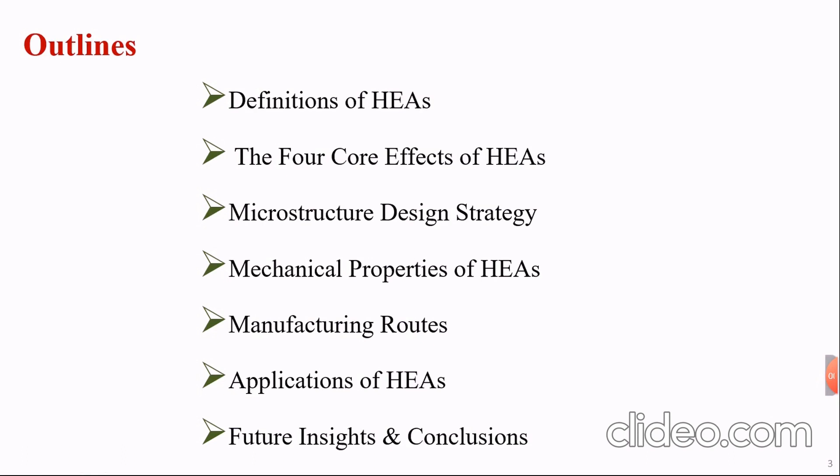As you know, since long ago, materials engineers have been looking for a good combination between strength and toughness, which is not easy because both properties contradict each other. When you increase the strength of the alloy, you lose toughness, and vice versa. Therefore, metal matrix composites, ceramic composites, oxide-dispersed alloys, max-phase alloys, and high entropy alloys have been developed.

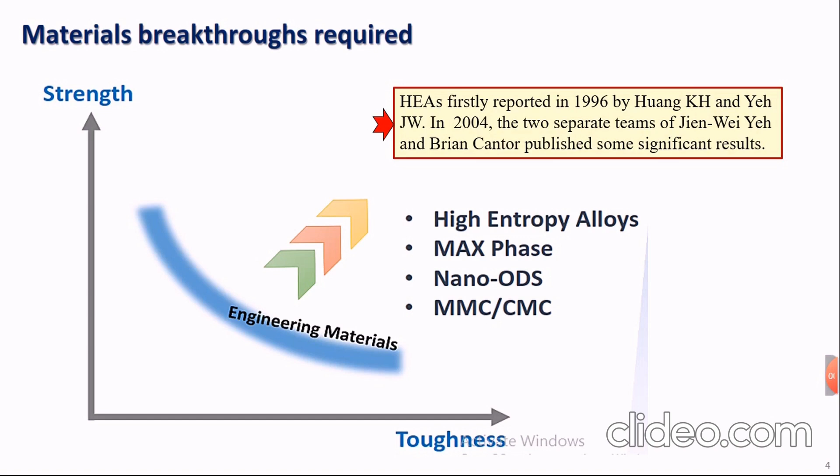High entropy alloys started as a research project for some students in 1996. Then in 2004, two separate teams, Yeh and co-workers, and Cantor and co-workers, published some significant results about high entropy alloys. Since this date, several papers have been emerging.

So, what's a high entropy alloy? High entropy alloys can be defined as multi-principal element alloy, or equiatomic alloy, or compositionally complex alloy, or concentrated solid solution alloy. We will see the reasoning for each definition.

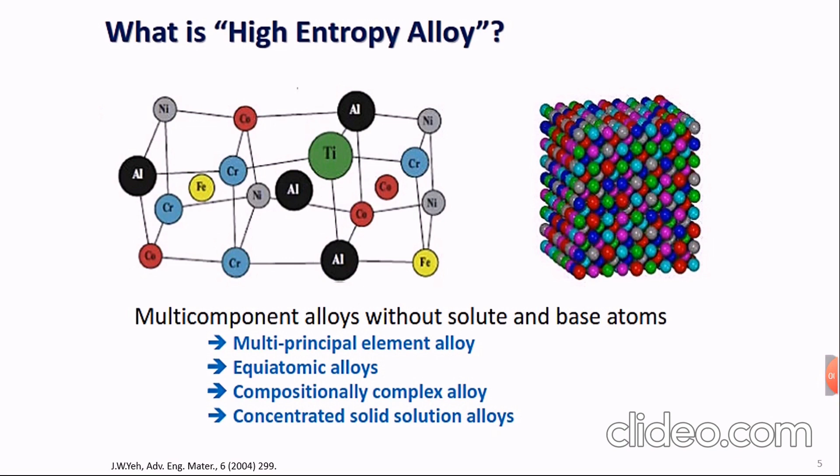We have in the galaxy a very, very large amount of elements, and you have freedom to mix these elements in your own way to form a high entropy alloy. So you have an unlimited number of possible alloys, because you can design the alloy as you like.

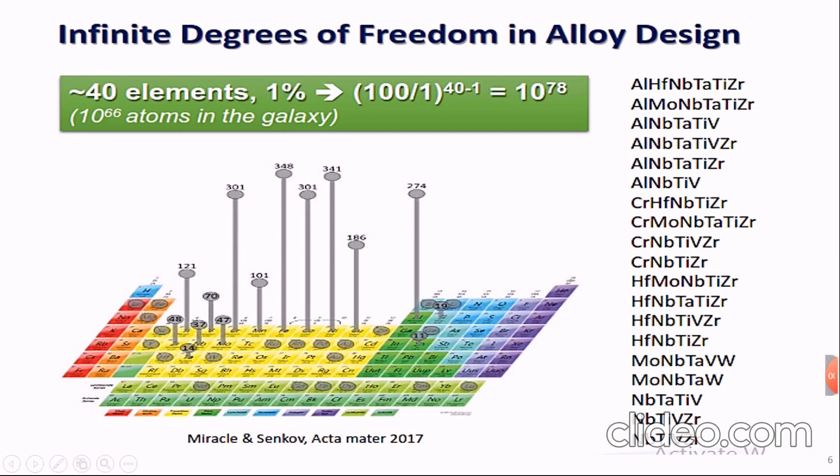You can design the alloy according to your requirement. You can make light alloys, ceramic alloys, refractory alloys, hard alloys, soft alloys - it depends on your choice. So some people say, based on that concept, we can call it multi-component alloys or multi-principal alloys.

Some others said, no, we'll call it high entropy alloys or equiatomic alloys. Why? Because the concept of high entropy alloys is that you mix elements in an equiatomic or near-equiatomic manner to increase the entropy of the system.

Why do you need to increase the entropy of the system? Because if you remember the Gibbs free energy equation, if you increase the entropy of the system, you will decrease the free energy. And if you decrease the free energy of the system, you can have solid solutions. That's why some people also call it solid solution alloys.

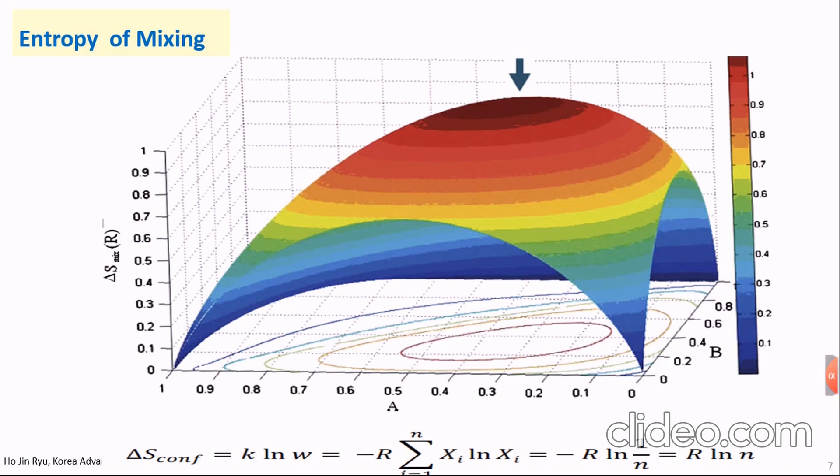In high entropy alloys, our main target is to have solid solutions, not intermetallics. You can have some intermetallics, but very limited. The main concept is to design solid solutions.

Simply, you can say high entropy alloys are alloys that have at least 4 or 5 principal metallic elements, and they can have equal or near equal compositions. For example, we have equimolar aluminum, cobalt, chromium, copper, iron, nickel, and we can also have non-equimolar compositions, as you see.

We can have in high entropy alloys minor additives like carbon and boron, but you have to be careful - the minor additives should be controlled, because if increased more than required, it will make the system unstable and you will not have the high entropy alloy you desire with solid solutions. You can end up with intermetallics, so we have to pay attention.

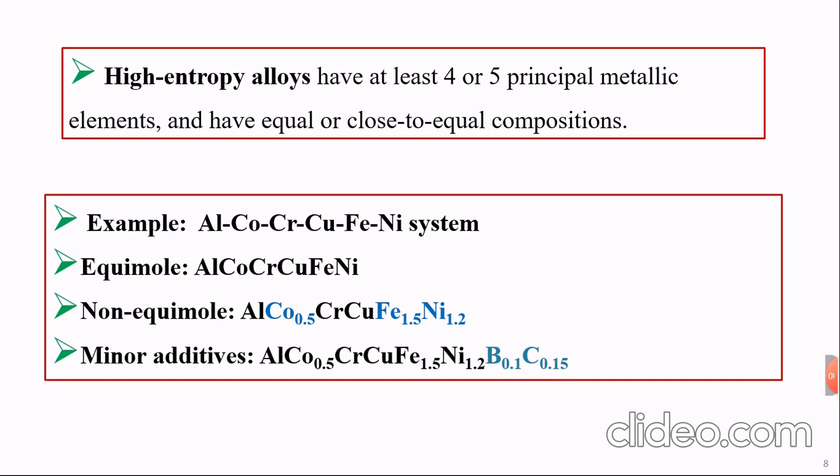Someone may ask, why do high entropy alloys have such extraordinary properties? This is due to the secrets I was talking about. The first one is the cocktail effect.

As you saw in the video at the beginning, we have a cocktail - this cocktail effect should produce special properties. Second, we have the high entropy effect - you have a special system with very high entropy, so you have to think about it. Also, we have the sluggish diffusion effect, and the most important one is the lattice distortion effect.

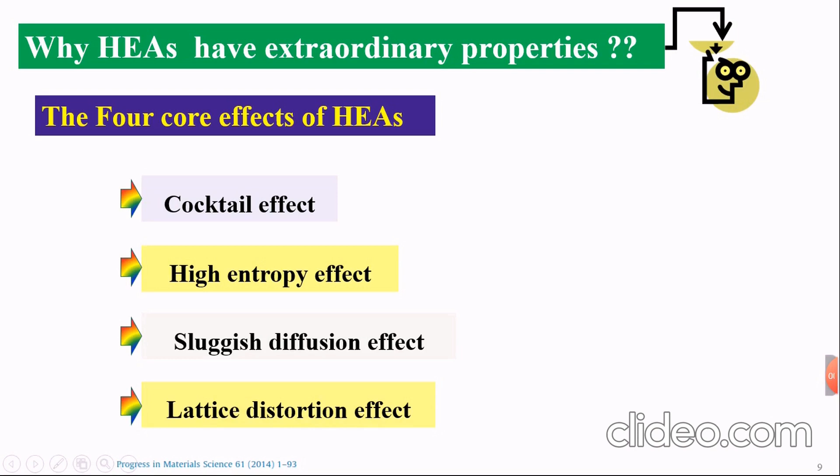What does the cocktail effect mean? In regular alloys, if your alloy is an aluminum alloy, you expect it will be soft and deformable, and so on. If you have a titanium alloy, you expect it will be hard, have high strength, corrosion resistance, and so on.

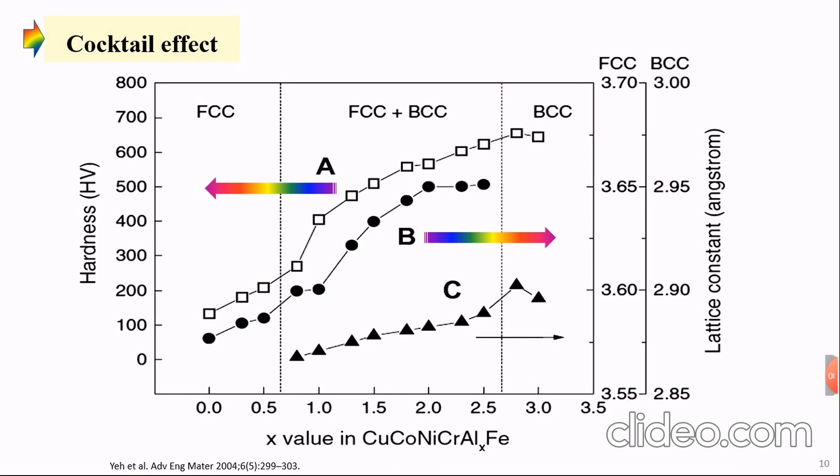Unexpectedly, the hardness increased with adding aluminum, although aluminum is a soft element. So here you obtain properties which cannot be expected - that's why they call it the cocktail effect. In the beginning of the video, if you remember, in the cocktail you have a color which is different than the color of all the fruits. So this is a high entropy alloy.

The second effect is the high entropy effect. Someone may ask, how high does the entropy need to be? Some researchers divided it into low, medium, and high entropy alloys based on plotting configurational entropy versus temperature, where configurational entropy is related to the gas constant. So if delta S over R is over 1.5, it's high entropy. If between 1 and 1.5, it's medium entropy. If lower than that, it's low entropy or even a conventional alloy.

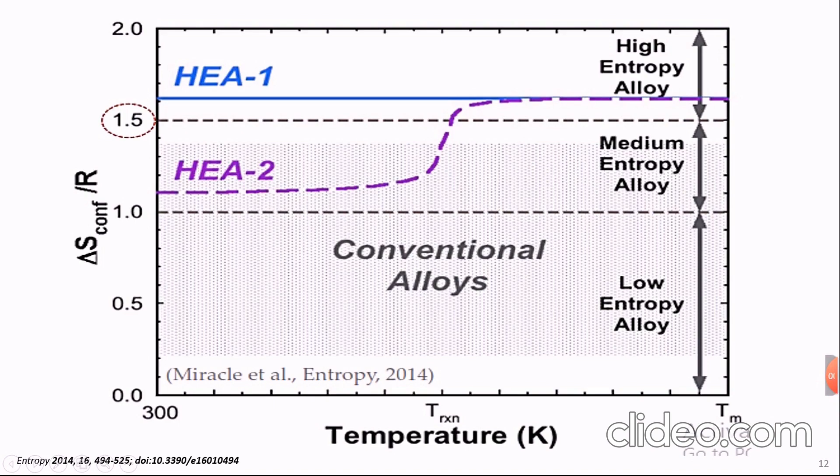Then we come to the sluggish diffusion effect. In high entropy alloys, diffusion is actually very slow. Why? Because you have a mixture of small, large, and medium atoms arranged in a funny way, so the variation of lattice potential energy among lattice sites is high. This creates numerous low lattice potential sites that act as traps and suppress atomic diffusion. Compared to a dilute solid solution, the high entropy alloy has traps in the diffusion path, like ants diffusing through an obstacle course. That's why diffusion is very slow - this is called the sluggish diffusion effect.

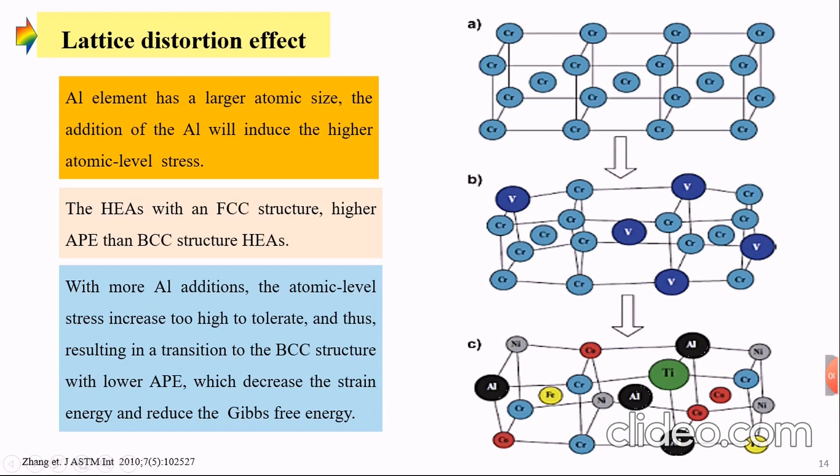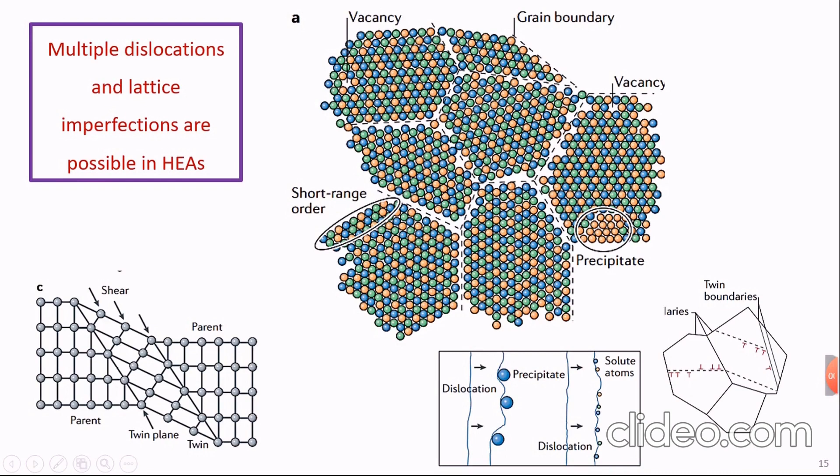The most important effect is the lattice distortion effect. Why? For example, if you have a system with small atoms and add a big atom like aluminum, the atomic-level stress increases too high. So the system has to reduce the energy, and in this case, as we saw in the previous alloy, the structure changes from FCC to BCC to decrease the Gibbs free energy. Because of this lattice distortion, we get many dislocations - all types you can expect in high entropy alloys, along with dislocation interactions. These dislocations and their interactions are responsible for the strength in high entropy alloys, so this lattice distortion effect is very important.

Microstructure design strategy of high entropy alloys is very important, because not all alloys with 4 or 5 principal elements in equiatomic ratio compositions can form high entropy alloys with solid solutions. According to previous studies, only carefully chosen compositions can form FCC, BCC, or a mix of them.

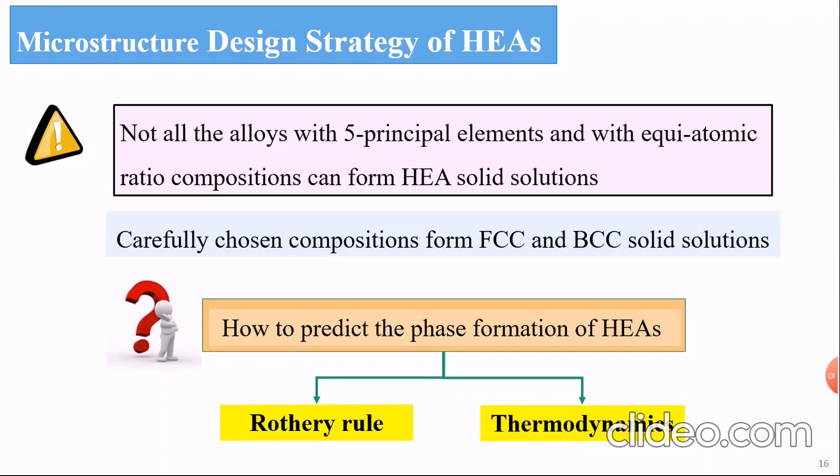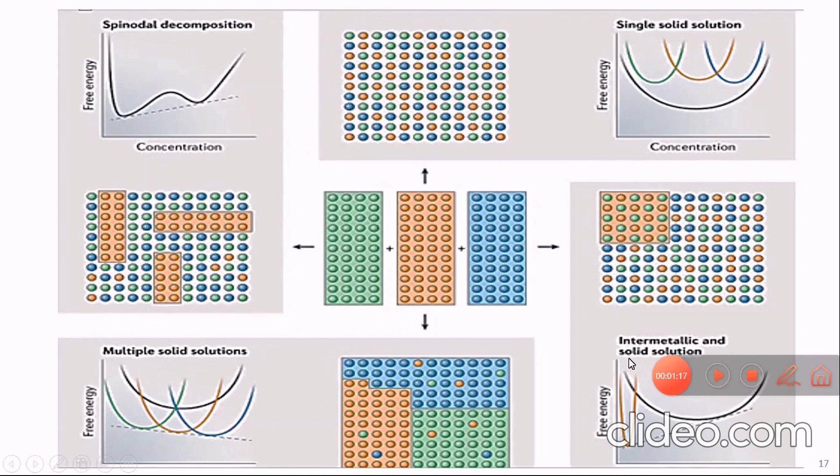So how do we predict the phase formation of high entropy alloys? To design a high entropy alloy, you have to consider the parameters that fall under Hume-Rothery rules and thermodynamics. If you mix three different elements, there are possibilities they form a single solid solution, intermetallics with solid solutions, or even multiple solid solutions, depending on the mixing manner. If you change the mixing method, you change the system - so you can have a single solid solution with intermetallics or multiple solid solutions.

The Hume-Rothery rule contains three main parameters: atomic size, electronegativity, and electron concentration. If we look at the XRD patterns comparing intensity and 2 theta for different high entropy alloys: with only two elements, copper and nickel, we get FCC. If you add aluminum, you can get ordered BCC. If you add cobalt to the system, you get normal, regular BCC. If you add more elements, you get different solid solutions. Why? Because every element added has a different atomic size, electronegativity, and electron concentration, affecting the total electron concentration in the system. So every element you add changes the type of solid solution formed - it can be single or double solid solution, ordered or disordered, depending on the additives you use.

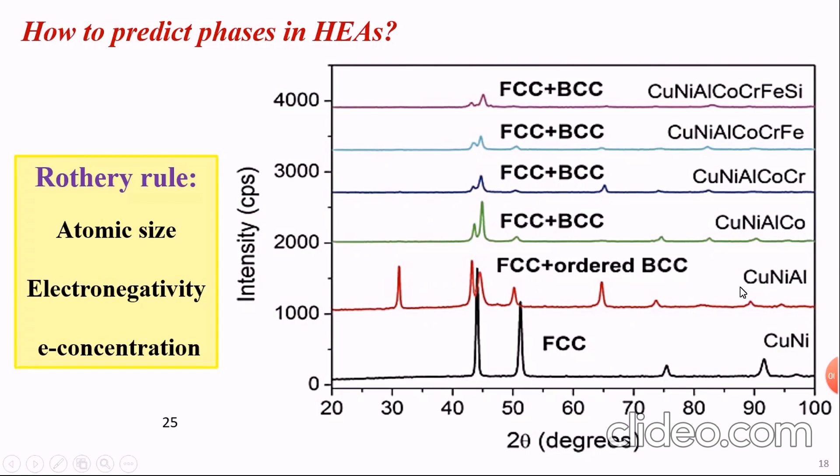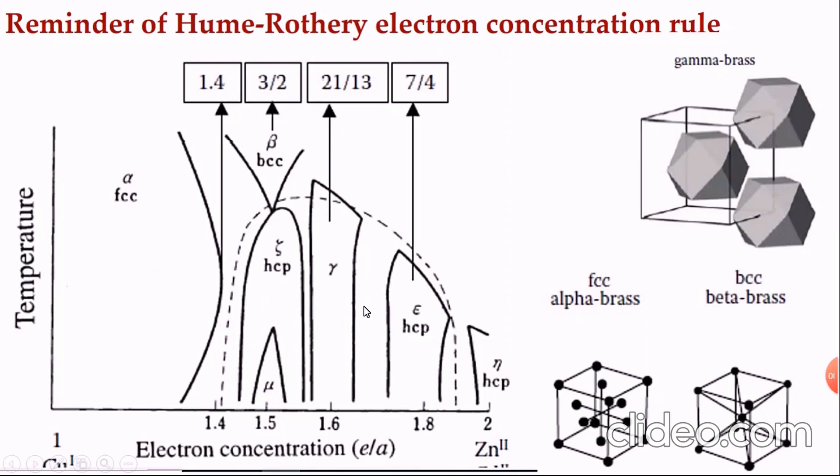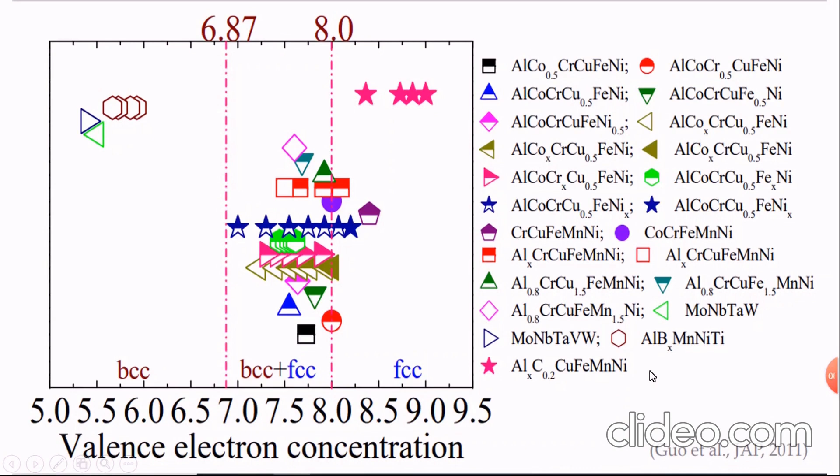Second thing to consider is the thermodynamic consideration of the system. Why? Because the main concept, as I said, high entropy stabilizes the formation of solid solution phases. To form a solid solution, we have to decrease the Gibbs free energy. As you studied in thermodynamics in your bachelor degree, if we maximize the entropy, we will decrease the Gibbs free energy, and at that time we can obtain solid solution.

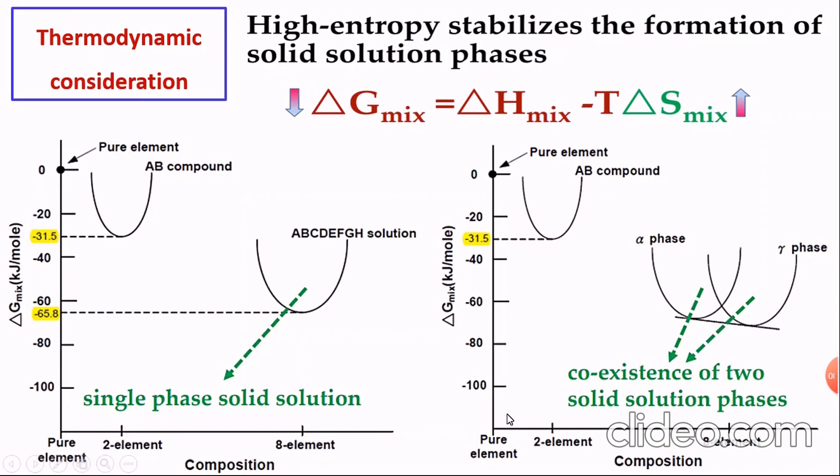Otherwise, we can obtain intermetallics. According to the Gibbs free energy plot with composition, we can have a single phase solid solution if we have delta G, or mixing entropy, or Gibbs free energy minus 65.8. For example, with decreased Gibbs free energy, we can have compounds. If we reach this level, we can have coexistence of two solid solution phases. So the value of Gibbs free energy is very important in determining the type of solid solution of your system.

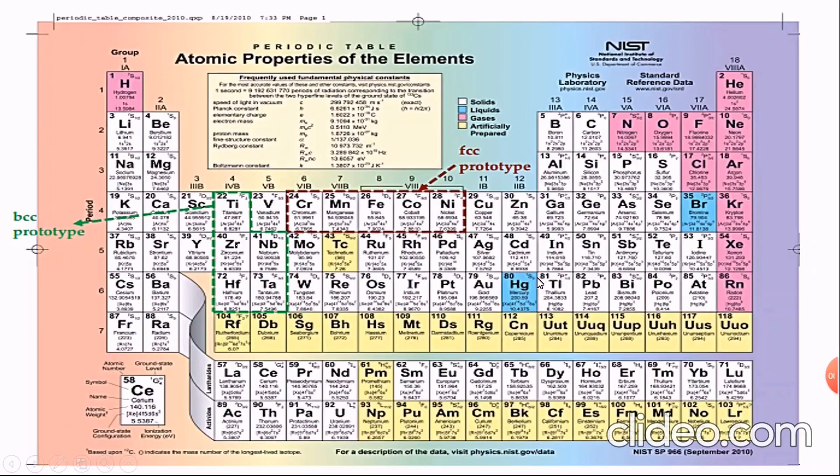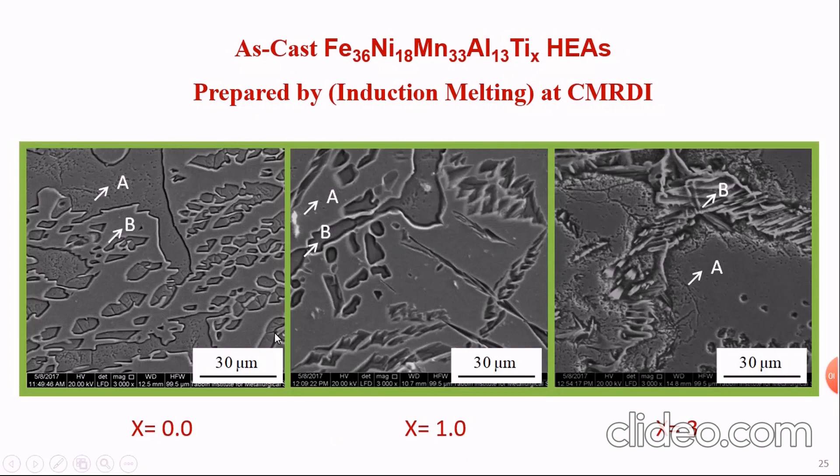These are examples, for instance, as-cast iron, nickel, manganese, aluminum, titanium high entropy alloys. These percentages are in weight percent, not atomic percent. This alloy was prepared at my institute by induction melting, repeating the induction melting process. This alloy has two phases, which changed in their percentages in the microstructure according to the titanium addition. This was 0 titanium, 1 titanium, 3 titanium. And here, as you see, you have solid solution of two phases.

Some other people, Wu et al., prepared an alloy by arc melting, nickel, cobalt, chromium, iron, aluminum, tungsten alloy. And as you see, you have two phases, FCC and BCC. And this is the elemental distribution of the different phases.

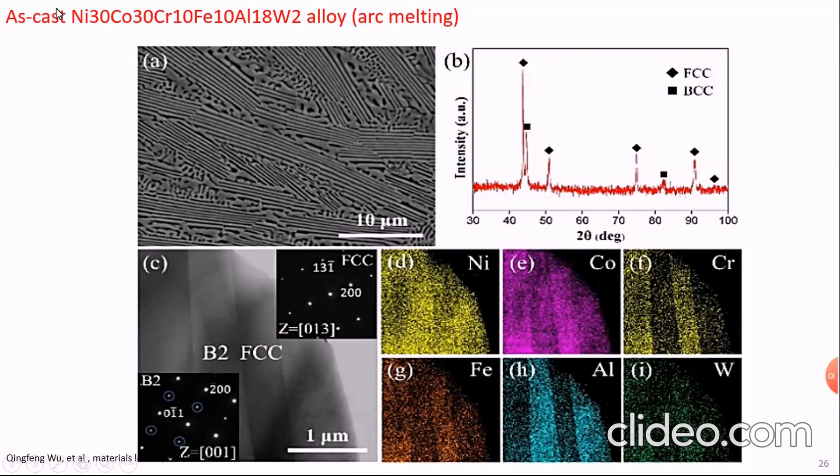Actually, high entropy alloy is a very interesting alloy, as you see. We also have lightweight high entropy alloys, which are based on light elements like magnesium and aluminum. Actually, the main difference is that in the literature, some researchers observe that in lightweight high entropy alloys, we have a greater amount of intermetallic compared to heavy weight high entropy alloys. Here, as you can see, we have some magnesium silicide along with the alpha magnesium matrix. So don't worry when you find intermetallics in your lightweight high entropy alloys.

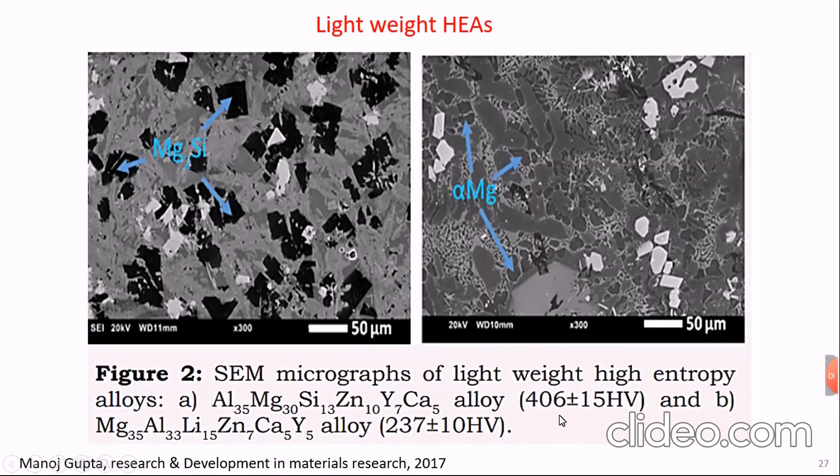It's usual according to the literature. Here, for example, this is aluminum, magnesium, silicon, zinc, yttrium, calcium high entropy alloy, and it showed good mechanical properties but has more intermetallics.

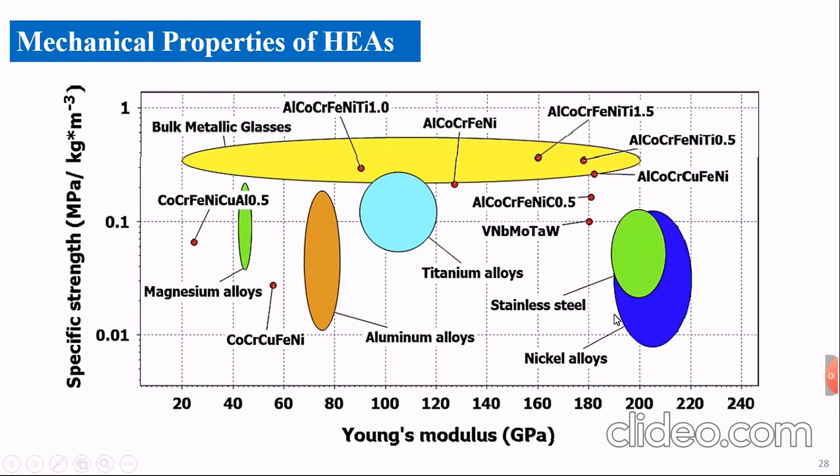Why do high entropy alloys have such specific strengths and this variety of Young's modulus? Because as I said before, the properties of high entropy alloys can be controlled. As we remember, this is an example of aluminum. When we add aluminum with little additives, increased one by one, it changes the structure completely from FCC to BCC. This means the properties totally change. So the control of properties in high entropy alloys is very good, and they can lead to extraordinary properties.

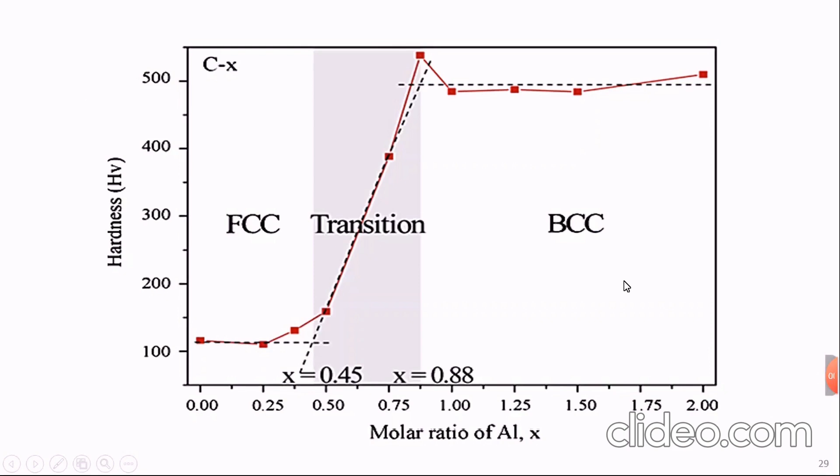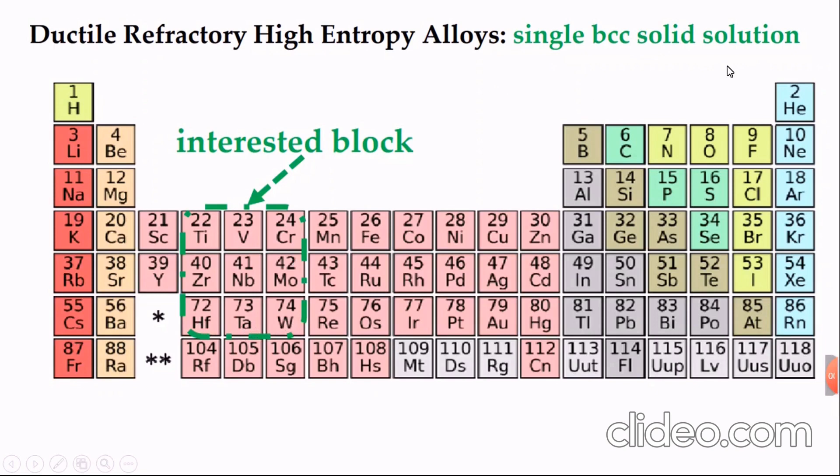Some people give examples of ductile refractory high entropy alloys, and it's very strange to hear ductile while we have refractory, which is very interesting. Some people suggested this interesting block of elements to have single BCC solid solution, and in reported research, they could obtain molybdenum high entropy alloys with 40% ductility, which is actually a very high percentage of ductility for a refractory high entropy alloy.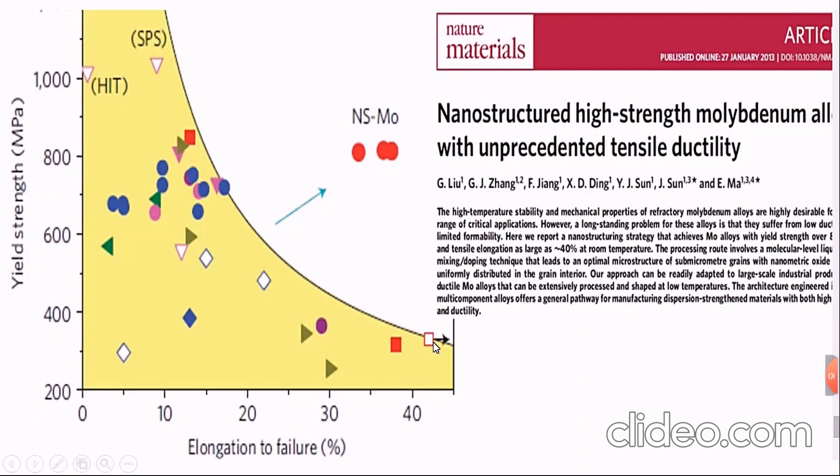Of course, in high entropy alloys, it's better to study the microstructure by transmission electron microscope, because most of the features that give the properties to high entropy alloys cannot be seen without it. So it's very important, especially if you design a new alloy and need to reveal the reasons behind the good properties, you have to use transmission electron microscope facility.

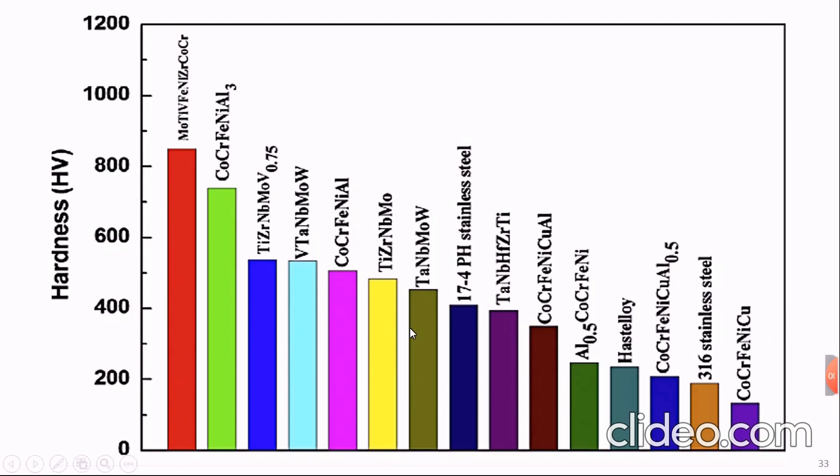If you compare the hardness of high entropy alloys to Hastelloy, super alloys, and steel, you can find that high entropy alloys acquire the highest hardness among the other alloys. And of course, hardness is related to strength, meaning these alloys also have high strength.

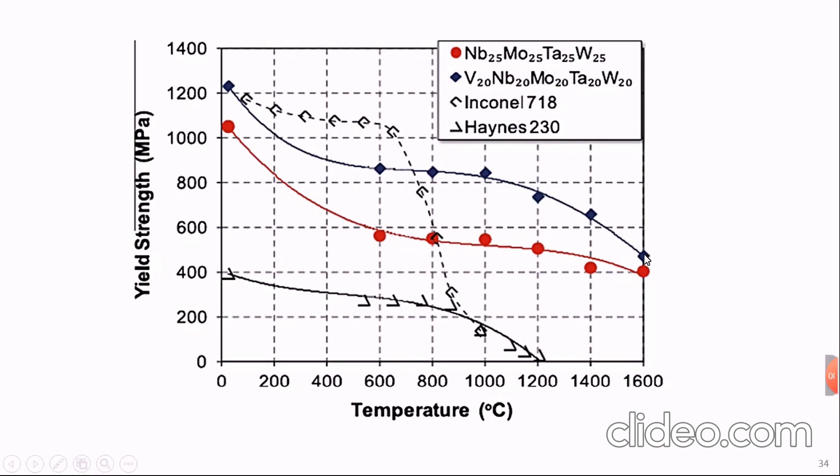Another important thing is strength at high temperatures, which is very important for some applications like the aviation industry. If you compare the yield strength at different temperatures for two high entropy alloys to the super alloys Inconel and Haynes, we can find that high entropy alloys can extend their lifetime to higher temperatures. They can extend and keep their strength at higher temperatures, so it's very good for high temperature applications.

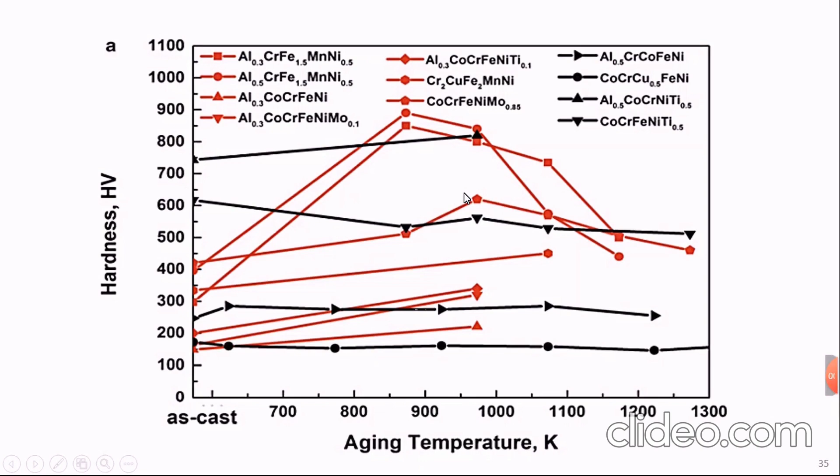Also, high entropy alloys, similar to regular alloys, can be modified by heat treatment. So the strength can be enhanced further by heat treatment, which is very good. This is an example of different alloys that acquire higher strength with temperature of aging.

Then we come to the practical part of the lecture, which is manufacturing routes. Some people divide the manufacturing routes into gas-based, liquid-based, and solid-based processes. But here I followed another type of classification, according to the produced product.

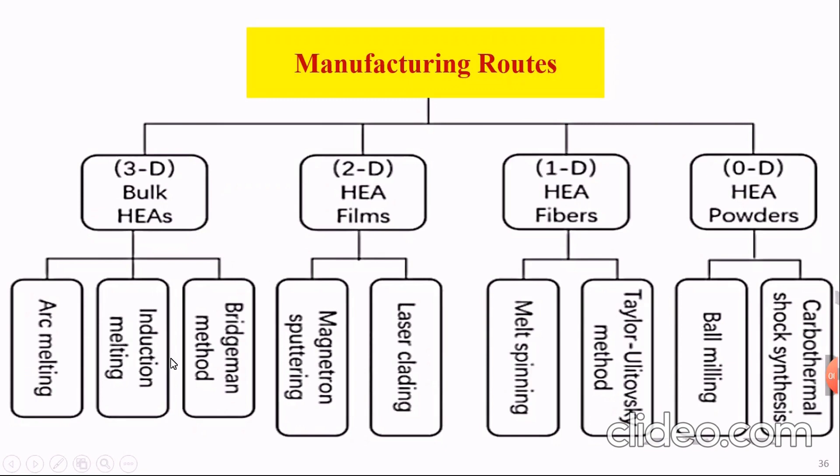For example, high entropy alloy powders, which are zero dimension, can be fabricated by ball milling. High entropy alloy fibers can be fabricated by melt spinning. Two-dimensional high entropy alloys like coatings and films can be fabricated by laser cladding or magnetron sputtering. For 3D bulk high entropy alloys, they are fabricated by casting methods.

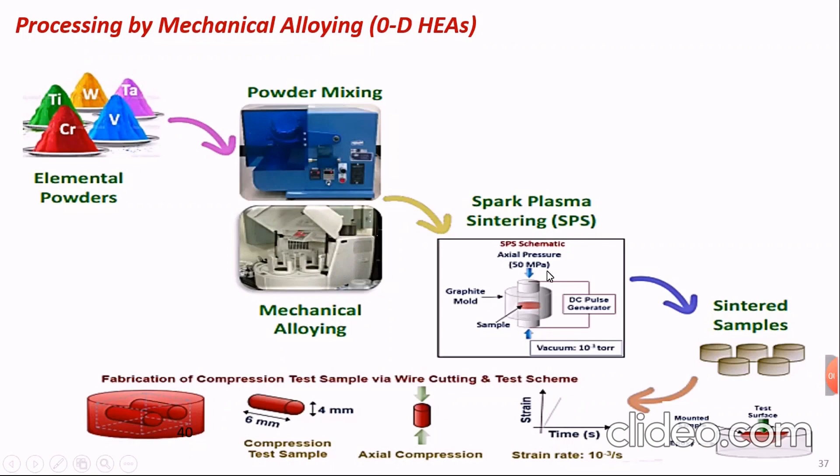First is to fabricate zero-dimension high entropy alloys by mechanical alloying. You have to follow the steps for powder metallurgy, which is powder mixing, sintering, compressing, and so on.

Here is an example of mechanical alloying. This is a high energy ball mill in which the particles strike together, so there is kind of fracturing and cold welding occurring. The particles are combined together under this interaction in the high energy ball mill, for example, in the high entropy alloy nickel, cobalt, iron, chromium, aluminum.

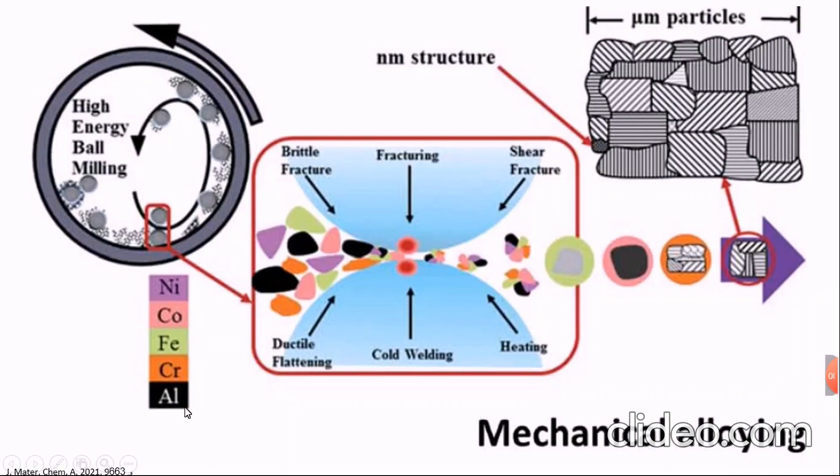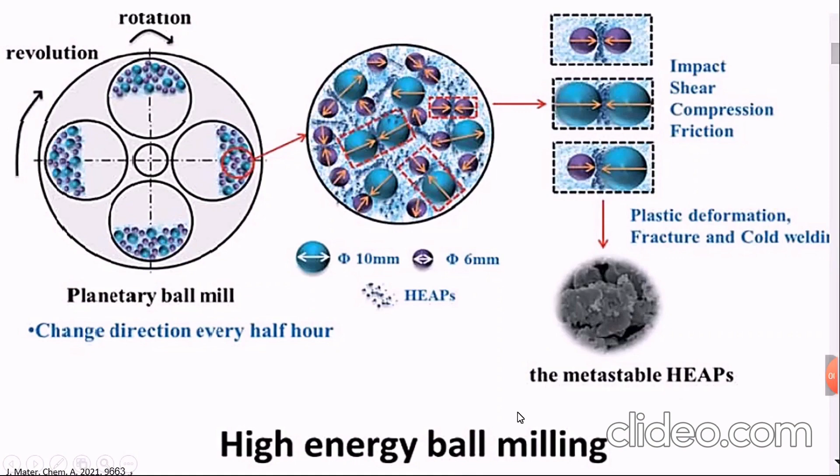Another type is the planetary ball mill. In this type, the direction of rotation is changed every half an hour. The particles strike together with impact, shear, compression, fracture, then plastic deformation fracture and cold welding. This is how metastable high entropy alloys are produced by high energy ball milling.

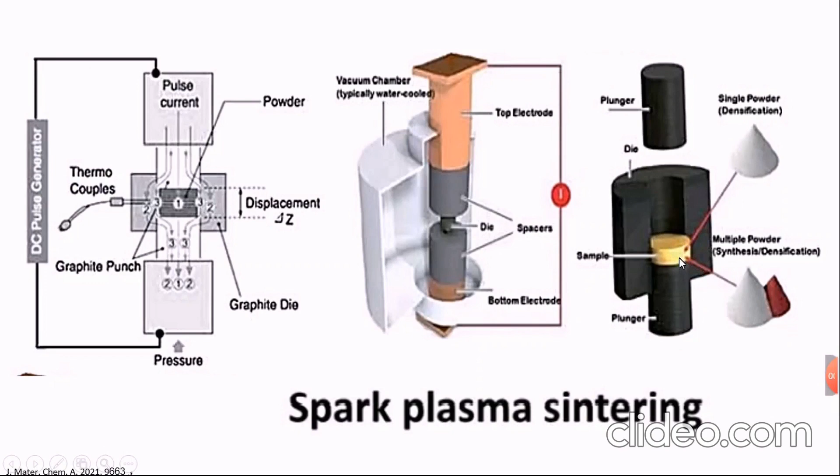Also, spark plasma sintering is one of the known techniques to produce high entropy alloy discs, for example. This is a high entropy alloy produced from multiple powders by synthesis and densification.

High entropy alloy fibers can be processed using melt extraction. Here we have the charge in the crucible surrounded by an induction coil. Once the melt is ready, it's exerted onto the moving copper wheel, so you get your fibers.

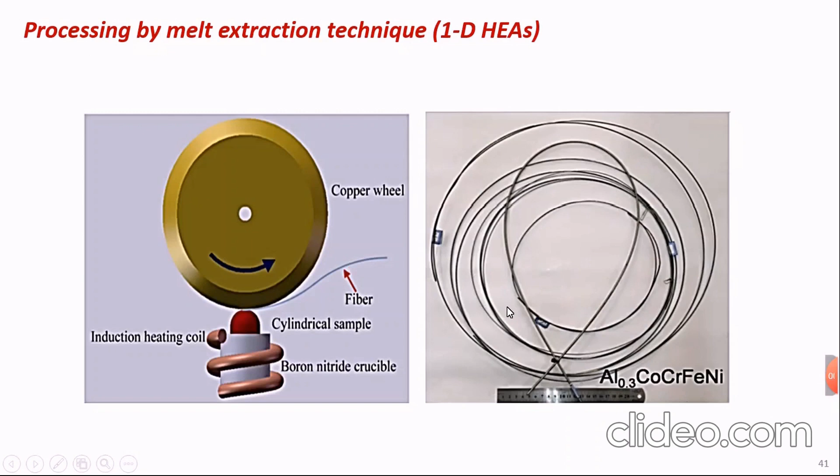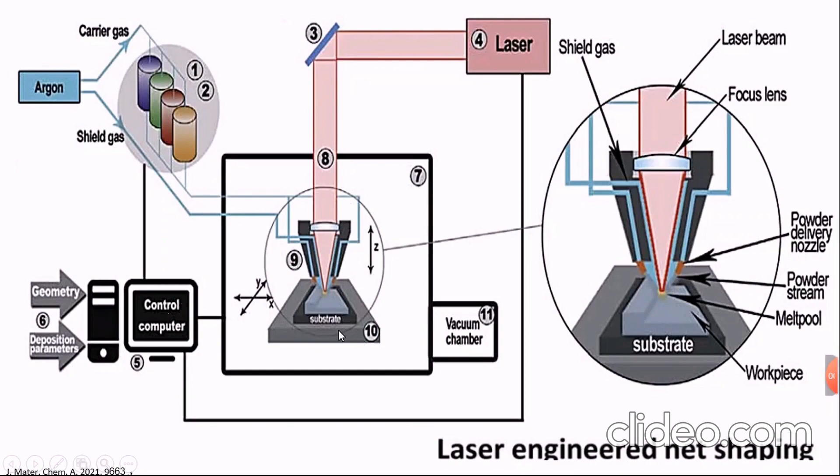One of the most famous techniques is laser cladding, because it allows net shaping, and you can control the rate and temperature to obtain films, coatings, or claddings over your product. Plasma spray process is also a very famous technique in which particles are molten and deposited on the substrate, as you see here.

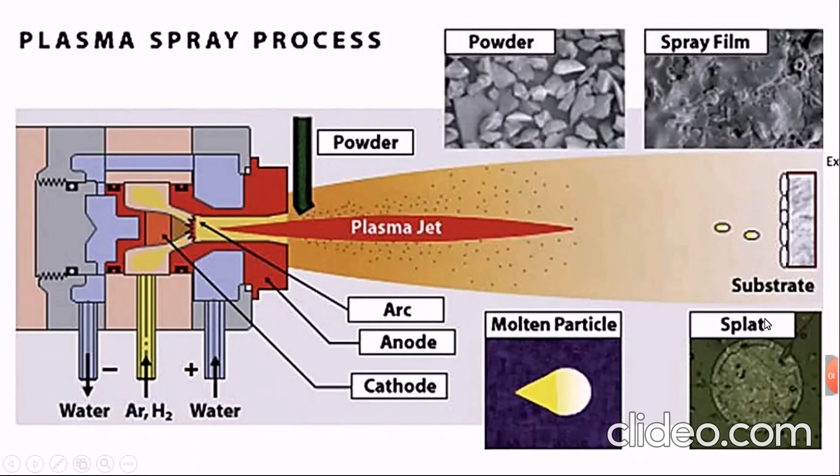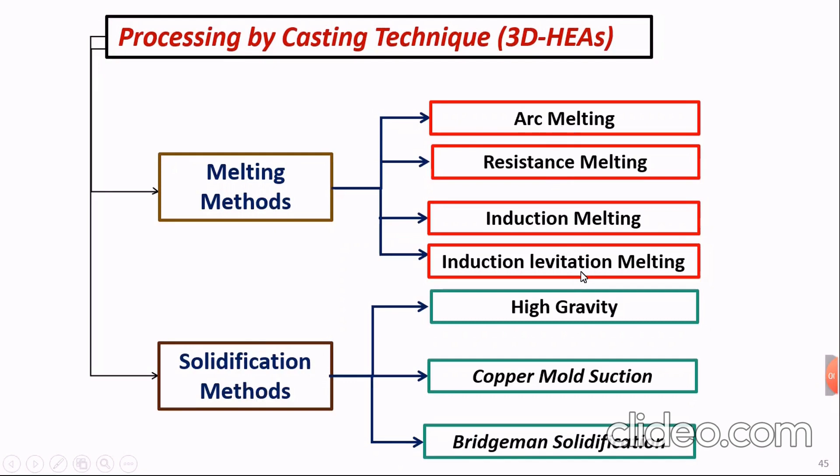Then we come to my specialty, processing by casting technique. Casting technique is divided into melting methods and solidification methods. We divide them because solidification methods are very important in controlling the as-cast microstructure. For melting methods, we'll talk about arc melting, resistance melting, and induction levitation melting. In solidification methods, we'll talk about high gravity, copper mold suction, and Bridgman solidification.

The most important or most famous melting method for high entropy alloys is arc melting. In this method, the charge is placed into the melting pot, and when the electrode comes very close to the charge, an arc is generated, and this arc melts the charge. This method is suitable for high melting point elements, like chromium, iron, vanadium, tantalum, and tungsten high entropy alloys. Of course, it's not suitable for low melting point elements.

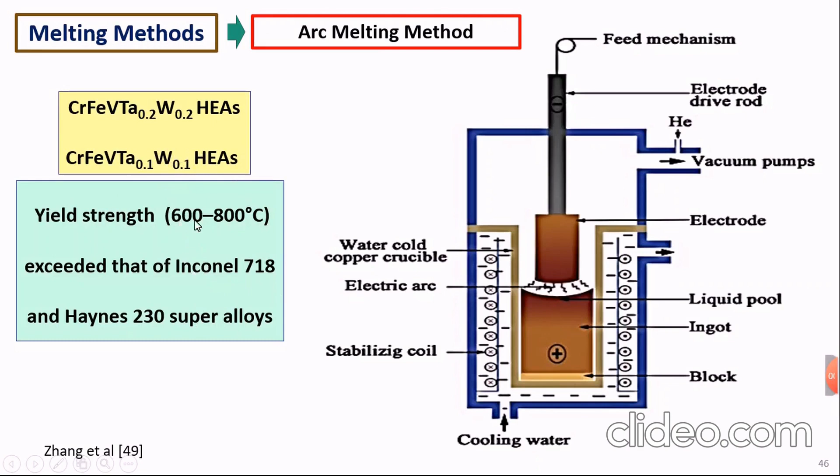The high entropy alloys produced by this method showed high yield strengths compared to superalloys at higher temperatures.

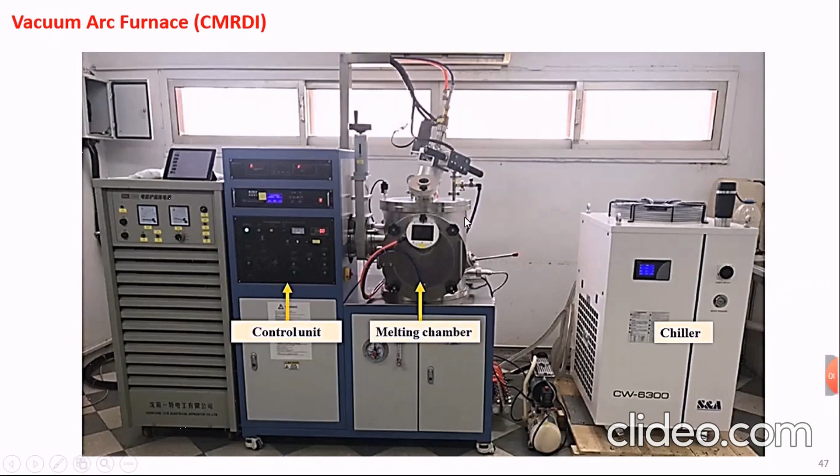This is a vacuum arc melting facility at my institute. We have the chiller, the control unit, and the melting chamber. Inside this melting chamber, the charge is put into the crucible pots, and this is the melting electrode used for melting. Once the melt is ready, we wait for it to solidify, then we melt again. Why melt again? Because repeating the melting process homogenizes your sample.

How many times should I repeat? Some people say 3, some say 4, some 5, some 6. No, it's not important how many times. The more important thing is to obtain homogenized samples, because alloys and elements differ in their viscosity and fluidity. So it's up to your sample, up to your design system.

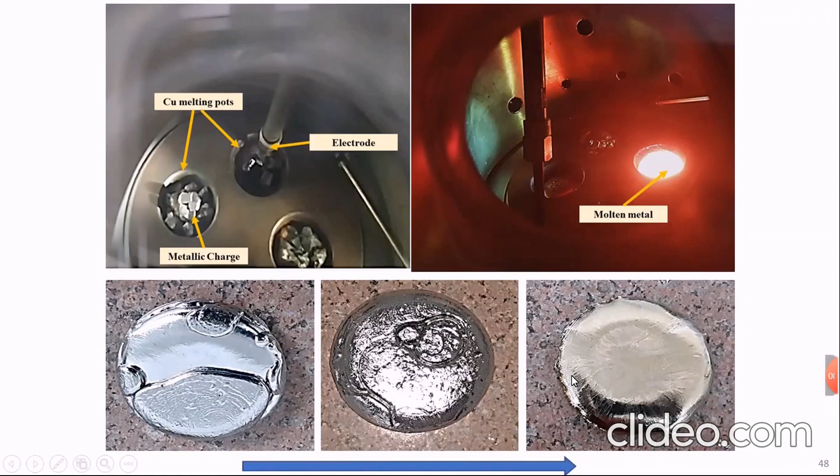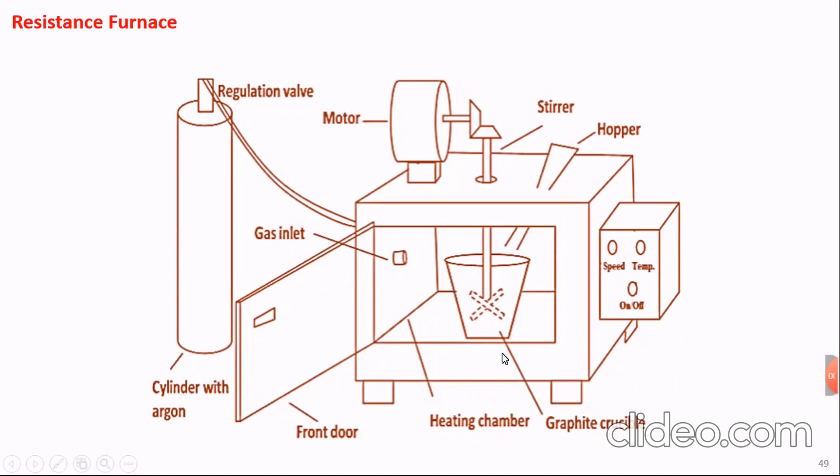Some others use a resistance furnace for low melting point alloys like aluminum and magnesium alloys. They use stirring to mix the components well, and they cast under argon gas to keep the melt away from oxidation.

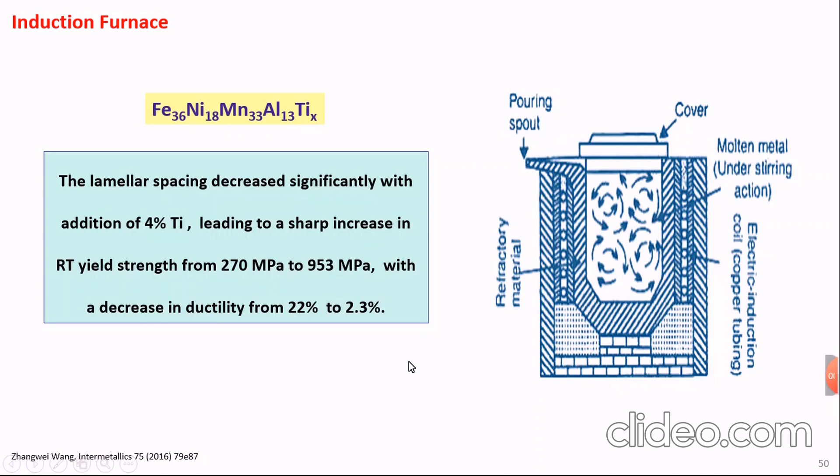The second important melting method is induction furnace, or induction melting. In this method, the charge is inserted into the crucible and surrounded by an induction coil. This method is suitable for melting most high entropy alloys, except for the refractory ones, which require much higher temperatures.

At my institute, we have two facilities. We have an induction melting facility in open air, which we use for non-reactive high entropy systems. For reactive high entropy systems, like titanium biomedical high entropy alloys, we use a vacuum induction melting furnace to avoid oxidation.

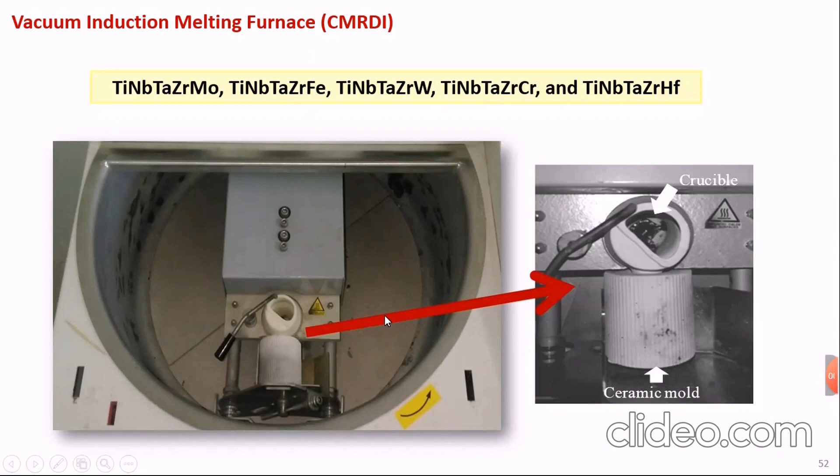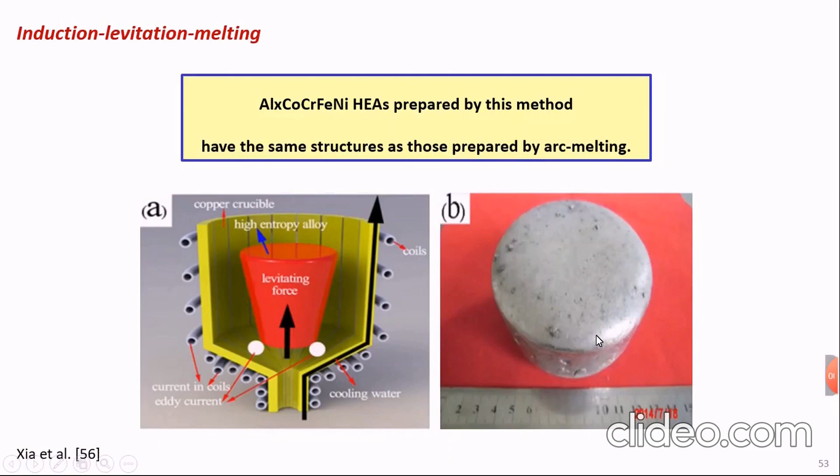The fourth melting method is induction levitation melting. In this method, the charge is heated by eddy current, and we can obtain a large sample, maybe 1 kilogram or more.

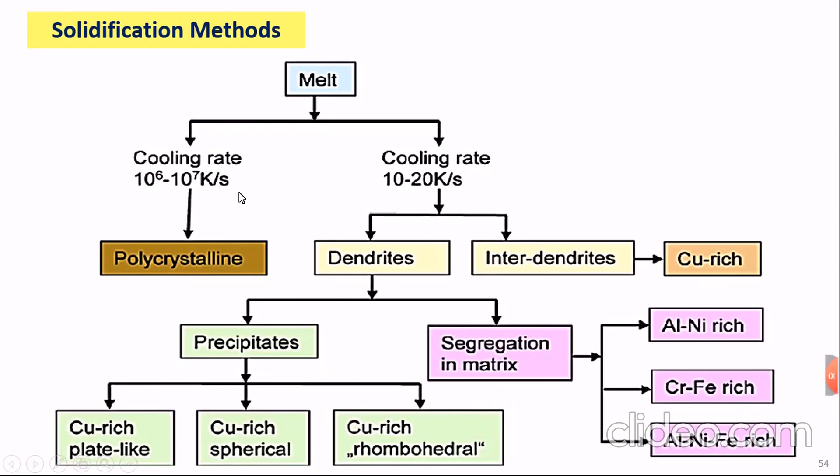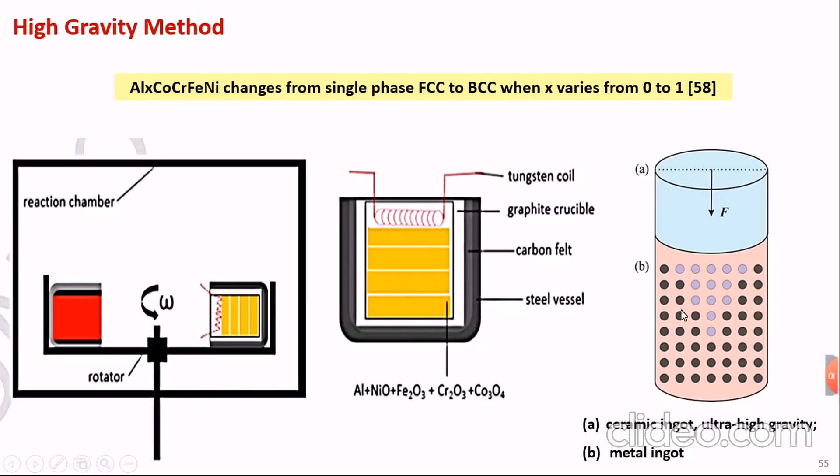For solidification methods, there is a method called the high gravity method. It's not frequently used, but I have to mention it because it appears in the literature. For example, a group of researchers used aluminum, cobalt, chromium, iron, nickel, and solidified using this method, obtaining a single-phase FCC structure, which changed to BCC with aluminum addition, as we explained previously. In this method, they obtained the elements and oxides and heated them in a graphite crucible using a tungsten coil, and once melted, they applied rotation or centrifugal force. Then they obtained high entropy alloys with a graded structure.

One of the well-known methods is the copper mold suction method. In this method, after melting in arc or induction furnace, we pour into a water-cooled copper mold to control the cooling rate. We can control the temperature of the water that cools the mold and obtain the structure based on the cooling rate.

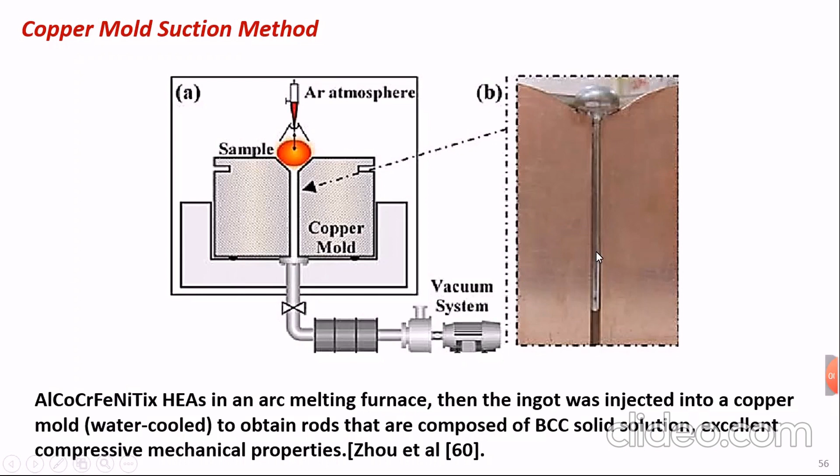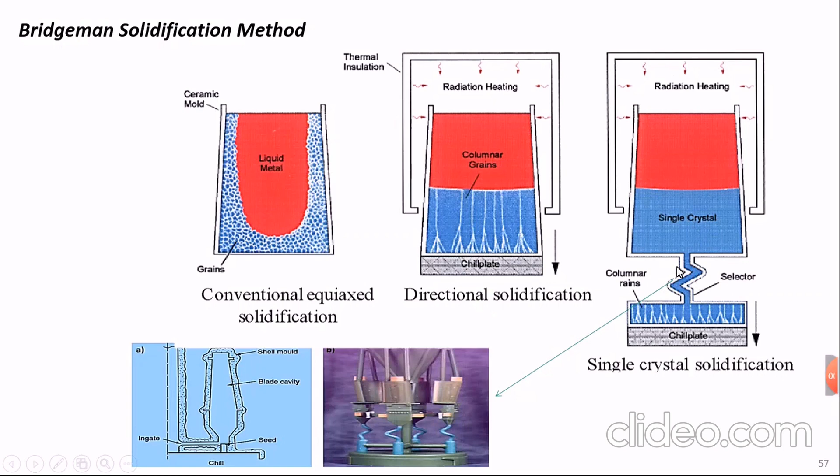In the case of Bridgman solidification, we insert the grain selector, which is prepared by investment casting using wax. When we insert this seed in the path of the melt as it exits the furnace or melting chamber, this seed selects only one grain, as you will see.

Here is the real photo of the Bridgman system. This shows the melt being cooled and drawn.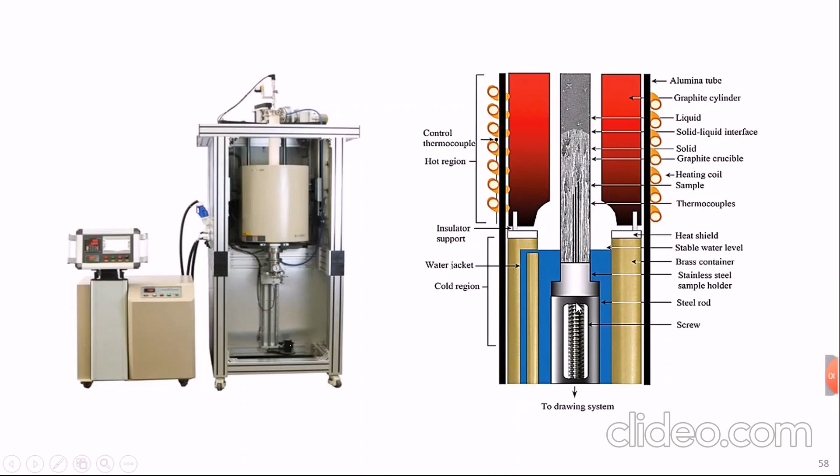This is a schematic representation of the melt going out of the Bridgman system. In the beginning, we have as-cast dendrites, then equiaxed grains, then columnar crystals, then the seed, fabricated by wax, which selects only one single crystal. We have to be cautious with this seed we insert, because it should be suitable to select only one single crystal and keep the structure of the Bridgman solidification method.

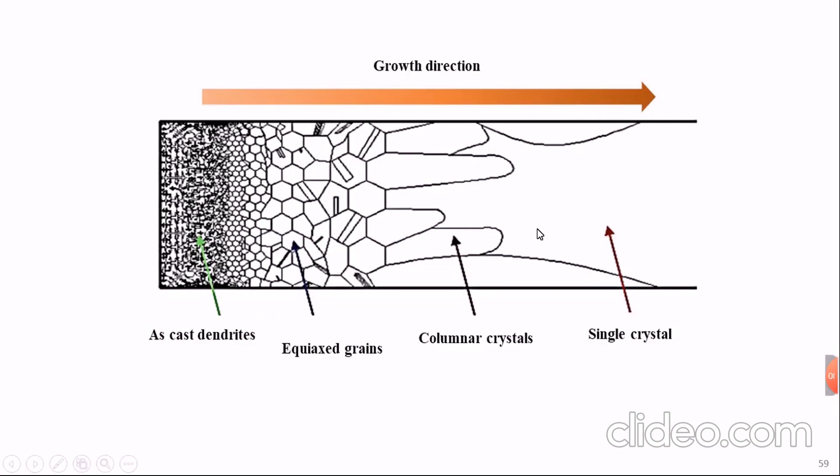They can be used for gas storage and energy storage materials, as catalytic materials and superconducting materials. They have been used in radiation protection for nuclear applications, and as magnetocaloric materials. So many applications are found for high entropy alloys, all because of their four core effects, which give them special properties and applications.

If we look at the specific strength with temperature for high entropy alloys, the first application that comes to mind is the aviation industry. Some parts in the airplane should keep strength at high temperatures, which is why high entropy alloys are favorable in this case.

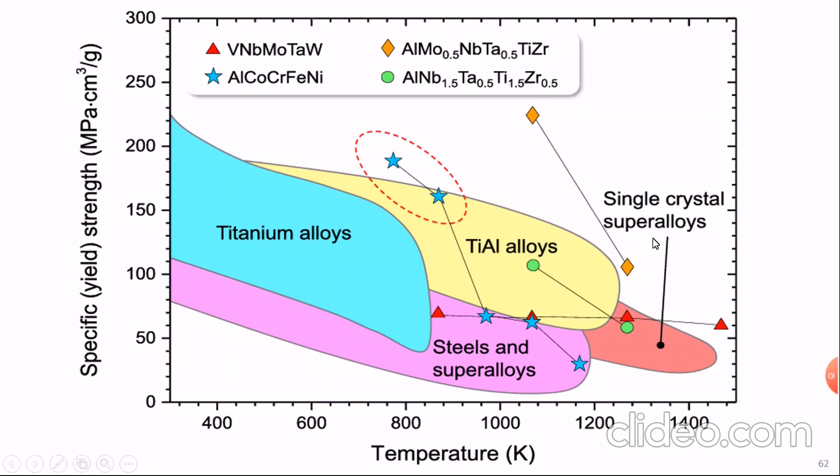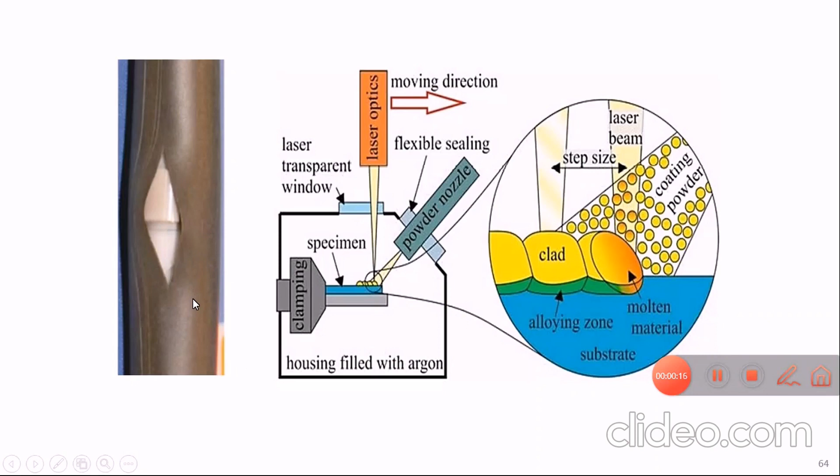In nuclear applications, sometimes bursts occur in the pipes, and to repair this burst they apply high entropy alloys by cladding technique, which proves efficient in repairing nuclear pipes. High entropy alloys are also used as fusion plasma facing materials, having thermal shock resistance. Some other high entropy alloys were designed for irradiation resistance and proved good creep resistance.

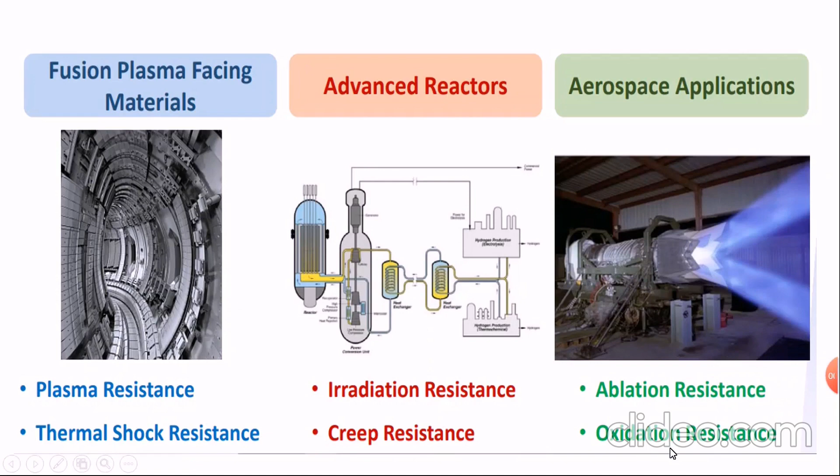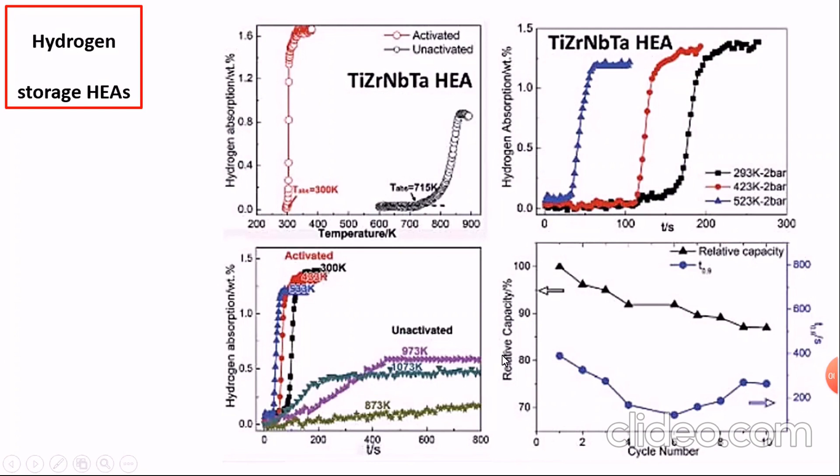In aerospace applications, as we said, sometimes it's used for its oxidation resistance characteristics. High entropy alloys also proved success in use as hydrogen storage materials. If you see here the comparison between hydrogen absorption and temperature for different high entropy alloys, you can observe how efficient these alloys are for use as hydrogen storage materials.

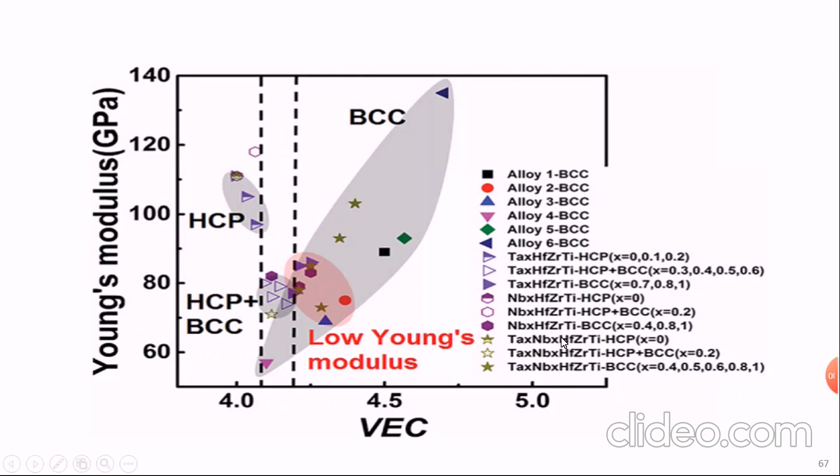For biomedical applications, a problem with titanium alloys as biomaterial is its high elastic modulus. In high entropy alloys, by controlling the valence electron, we can have low Young's modulus, close to that of bone. We have groups of high entropy alloys to choose from, so we can select the alloy suitable, for example, for implantation in the body. It's very good in this application.

Some other tested high entropy alloys for corrosion resistant applications proved good efficiency, better than nickel alloys and stainless steel.

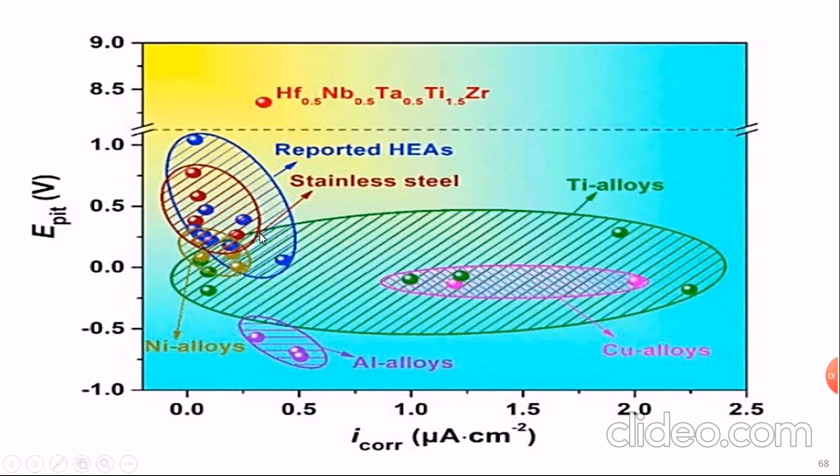If we talk about future insights of high entropy alloys, upon surveying published articles we found some points are missed. For example, very limited research is found on fatigue, creep, wear, and deformability of high entropy alloys, which are very important properties, especially in load-bearing applications.

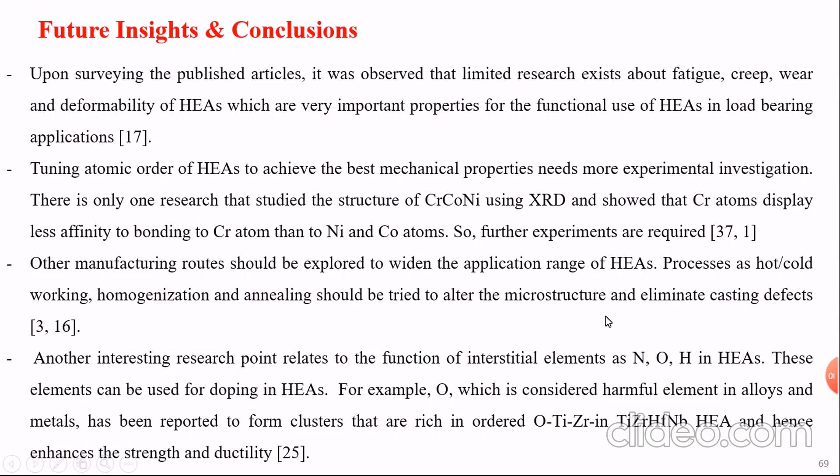Also, another interesting point: no one has revealed the role of interstitial elements like nitrogen, oxygen, and hydrogen in high entropy alloys, especially hydrogen, which causes hydrogen embrittlement in regular alloys. How can it behave in high entropy alloys?

Also, careful assessment is needed between the microstructure, heat treatment, and properties of promising high entropy alloys. We also need easier methods to fabricate three-dimensional bulk high entropy alloys for different applications.

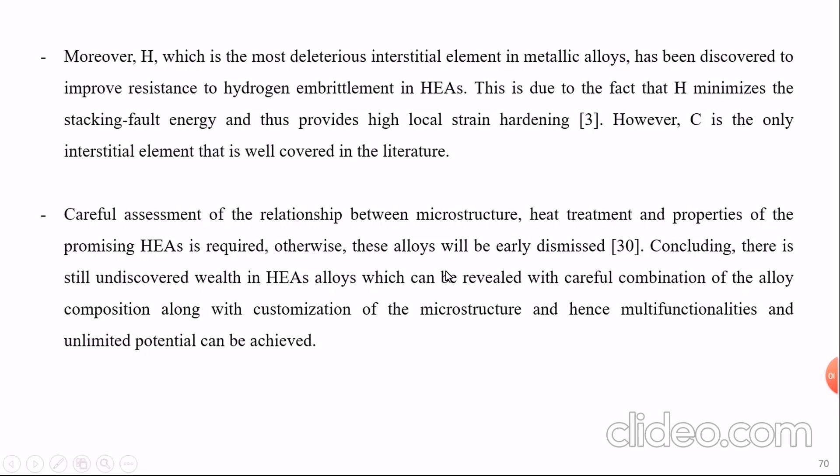Here in our presentation, everything was so short. High entropy alloys is a very large topic. I suggest you work on high entropy alloys because it's a nice and new group of alloys, and we need you as researchers, as future researchers. I encourage you to find industrial applications of this alloy, and to discover how we can fabricate cast three-dimensional high entropy alloys.